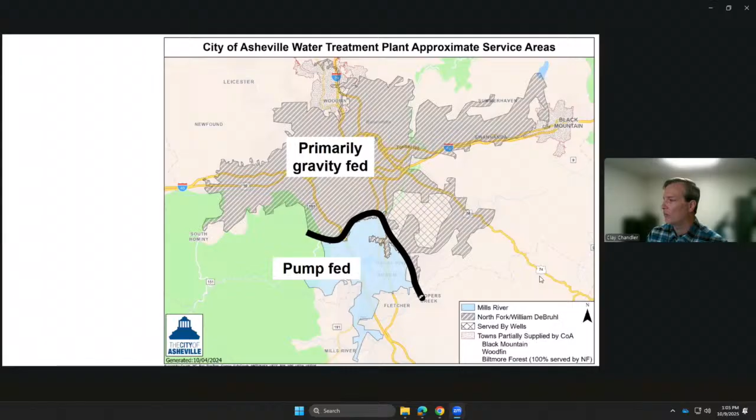We have 3 water treatment facilities. North Fork, in Black Mountain, is our workhorse. It supplies water to about 80% of our customers, and it pulls out of a reservoir. William DeBruhl is just over the ridge from North Fork, and that was actually our first treatment plant—a water treatment facility has been operating on that site a little more than 100 years now. Mills River, in the southern part of our service area, is our newest facility. It came online in 1999.

We are rated to 43.5 million gallons of water per day. Our average daily demand hovers somewhere between 25 and 30 million gallons of water a day. But if we have to, we can redline those operations and push out 43.5 million gallons of water a day.

So talking about the impacts from Helene, the southern part of our service area was impacted. There was some damage, but it was limited compared to what the northern part of our district experienced, as you'll see in some of the upcoming slides.

Mills River never lost operation. It continued to provide water in the immediate aftermath of Helene and afterward.

We had substantial impact to North Fork and DeBruhl. Those treatment facilities sit at the bottom, and the reservoirs they pull out of sit at the bottom of a mountain valley, so we had extensive flooding and extensive landslides there. They were in pretty bad shape in the immediate aftermath of the storm.

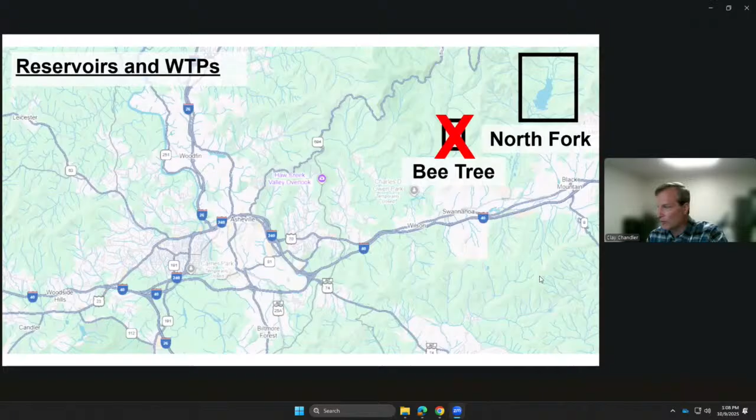Bee Tree was offline in the immediate aftermath of Helene. They had serious issues with landslides into the reservoir there, which drove up turbidity and eliminated the ability of our filters to handle that water. Bee Tree was the first plant to go offline during the storm.

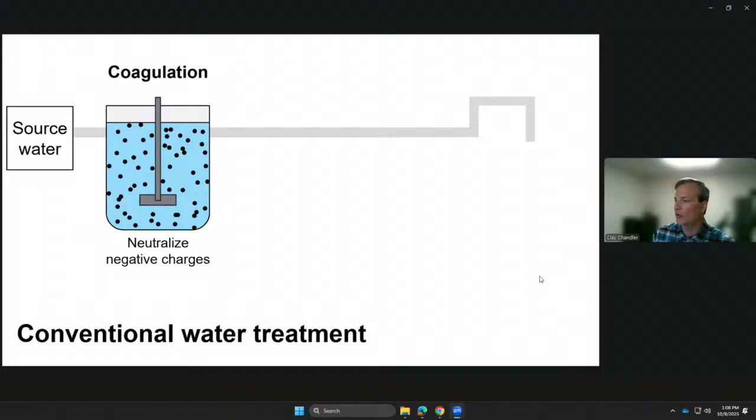We're the only water system in North Carolina that still uses that filter technology. We think we're one of the very few left in the United States, and that means our filters function best when they have pristine water to treat.

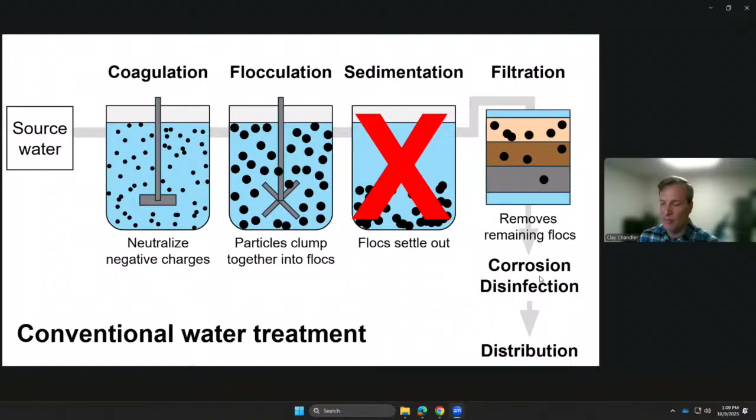Before Helene, they did. Our two reservoirs at North Fork and DeBruhl were pristine and crystal clear. In a lot of cases, the water directly out of the reservoir with no treatment or filtration almost met EPA drinking water standards. We were very, very proud of that. Generally, turbidity levels before the storm were less than 1. They're back to that now, have been for several months.

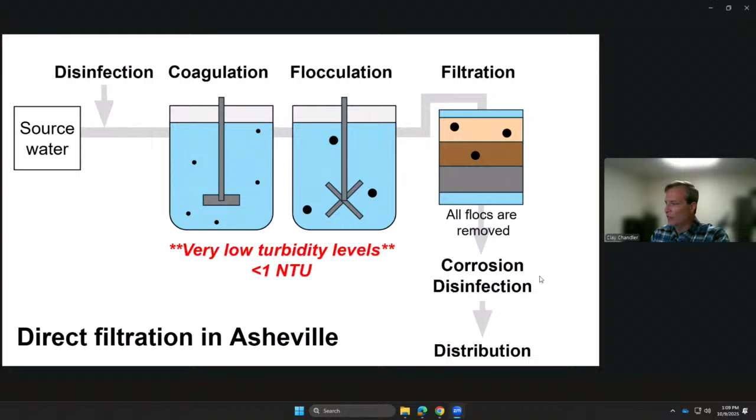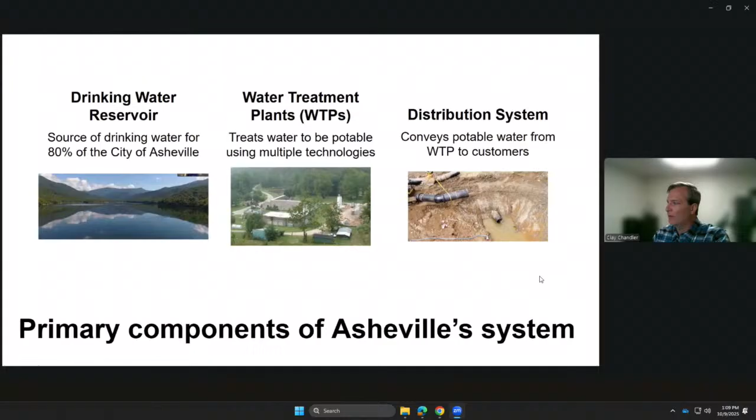You can see our treatment processes there. Before the storm, everything was great. The water was pristine, the filters did their job, they were happy. After the storm, that's a little bit of a different story. As you can see in the third square there, that's a preview of the damage that we were dealing with.

It washed out all 3 transmission mains coming out of North Fork: the 24 and 36-inch main lines, and the 36-inch bypass line that was installed after a hurricane event in 2004. That bypass line was designed to withstand an event like the one we had in 2004. As you will see here shortly, it was absolutely no match for Helene.

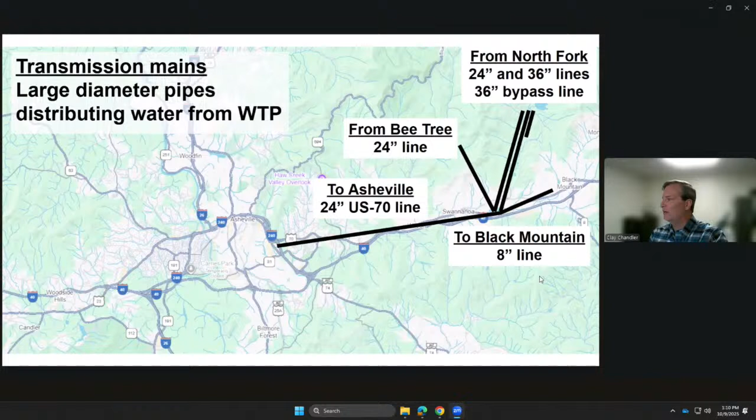Like I said, Bee Tree was also taken offline because of serious landslide issues into the reservoir there. Also taken out was an 8-inch line that serves one of our wholesale customers, the town of Black Mountain. Also taken out was our primary east-west corridor that runs along the Swannanoa River - in Swannanoa, that 24-inch line that runs along US Highway 70 was completely washed out as well. Again, visuals of all these coming up to show you.

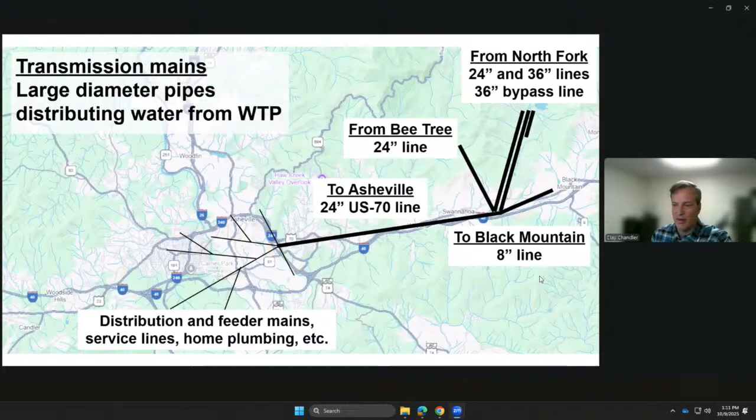We did have some damage in the city limits to our distribution system. We had some feeder mains and service lines that were messed up. Obviously, the internal plumbing of the homes that were in the path of the flood was messed up too. So we had a lot to deal with.

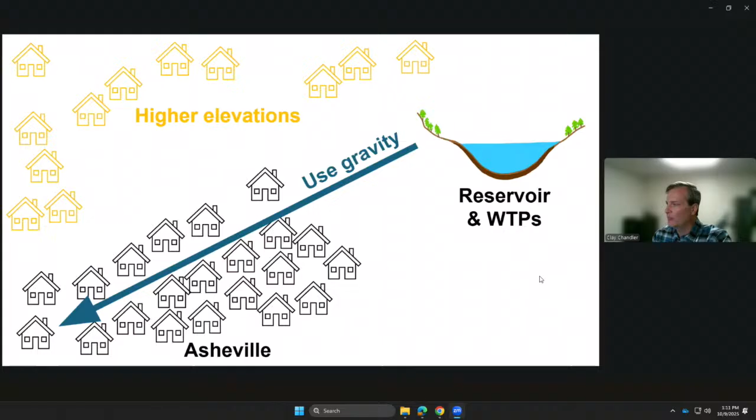The general way our system works, like I mentioned a minute ago, is we're gravity fed from our reservoirs. For higher elevations, we have a couple dozen pump stations that push water up those mountains and get them to the service connections.

That pumps the water uphill using a bunch of different pressure zones that we have. This is another thing that makes us unique. A water system of our size on flat ground would have one, maybe two pressure zones. As you can see, we have 43 scattered throughout our distribution system.

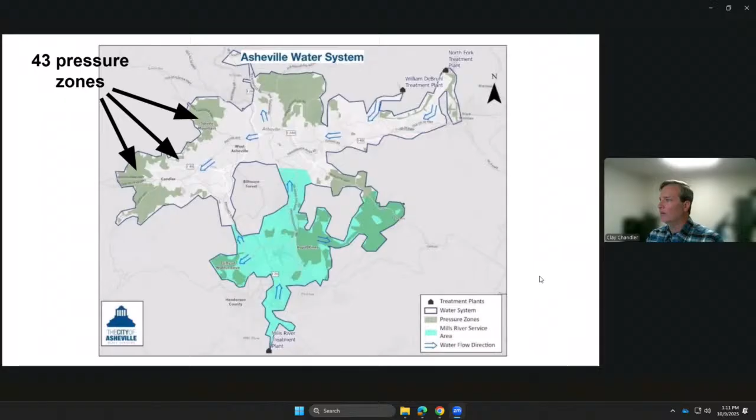That is a very delicate balancing act because you're talking about extreme pressure changes that are pretty close to each other. Our staff does a really good job of maintaining that balance. We have pretty amazing people who come to work with us every day.

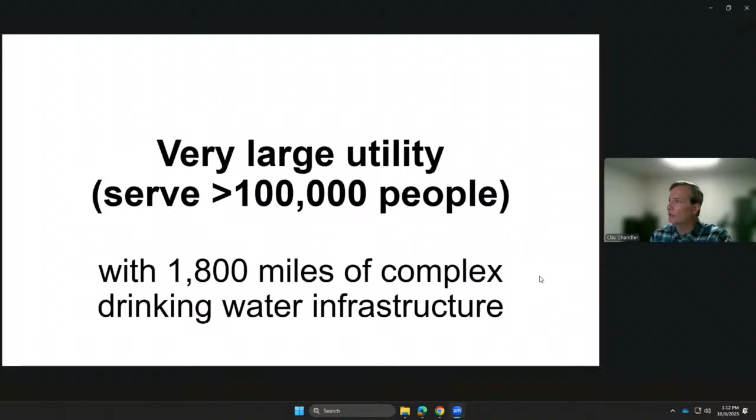We're considered a very large utility because we serve over 100,000 people. We have about 64,000 connections or meters that we deliver water to every day, and that translates to about 165,000 or so people who use the water. We have 1,800 miles of pretty complex drinking water infrastructure. For example, that is the same distance as traveling from Asheville to Miami and back, or from Asheville to Denver. So as you can see, we have our hands full under the best of circumstances.

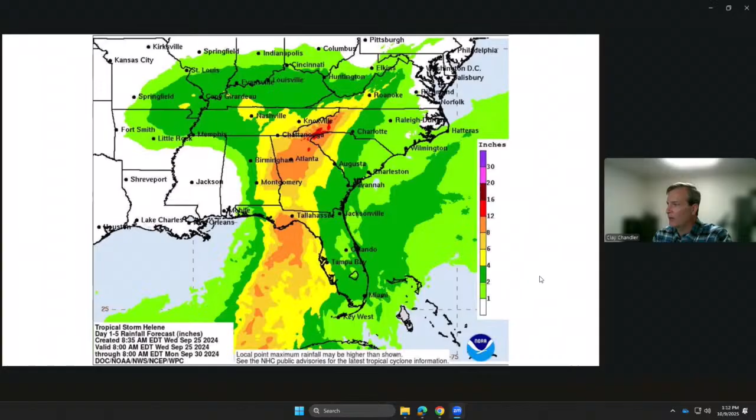In preparation for Helene, here's what we did. We doubled staffing at Mills River Treatment Plant and North Fork Water Treatment Plant. We routed water through that bypass I mentioned a minute ago. I think we did that on Monday or Tuesday of that week, a couple of days before Helene came through. We took water out of the mains coming out of North Fork and routed it through that bypass, which again was installed as a redundancy after a pretty severe 2004 hurricane event.

We created treatment plant status sheets. Brenna and I were both looking at those the morning of Helene. We were pretty locked in on those, and we knew around 10 o'clock that morning that we had a pretty serious problem because demand at North Fork jumped from around 25 million gallons a day to 35.

For customer communications, we have a system called AVL Alert. It uses the Everbridge software system. We can do system-wide or targeted communications to our customers. We leaned heavily on that, at least during the first part of the storm while we still had internet service. Internet service, along with every other utility, was knocked out starting, I think, around Friday night, Saturday morning, right around there. So we had to get pretty creative.

North Fork Reservoir, in 2020, we completed a resiliency project. It's the auxiliary spillway that complements the primary spillway that has been in place out at North Fork, I believe, since like the mid-1950s. It's a fuse gate system that is activated automatically when the reservoir reaches a certain level, like it did during Helene.

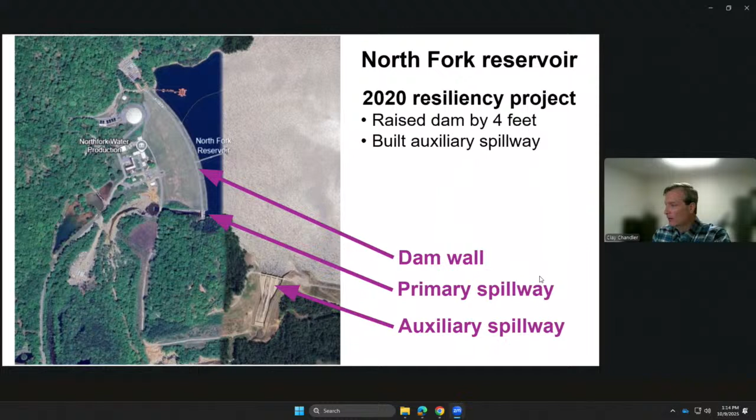Before Helene, we were 8 feet below full pool. By Thursday night, September 26th, which was the night before the worst of the storm got here, we were at full pool. So we went from 8 feet below to full in about 12 to 14 hours, which is pretty remarkable when you think about a reservoir that has 300 or so surface acres and 6 billion gallons of water in it. That gives you an idea of the amount of rainfall we were dealing with.

By 9:30 on the morning of September the 27th, which was the height of it, we were at 10 feet above full pool. So in about 24 hours, the reservoir, again 6 billion gallons of water across about 300 surface acres, rose 18 feet. I hope I never see that again. We remained about 10 feet above full pool until about noon on the 27th, once the worst of the storm got out of here.

That's the thing about Helene. It got here pretty quick and it moved out of here pretty quick, thank goodness, because if it had stalled any, it would have been so much worse than what it already was.

Here is the auxiliary spillway I mentioned. That was completed in 2020. It was about a $40 million project that, from design and construction to operation, took between 7 and 8 years. It relies on a fuse gate system. It's very pretty to look at. That's what it looked like before Helene.

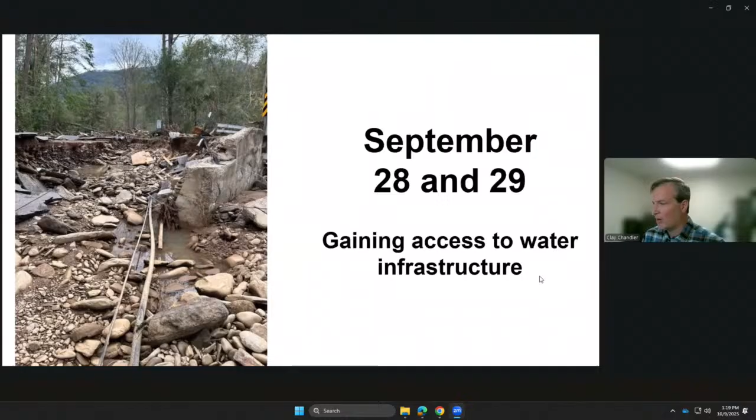I do want to give a shout out to the City of Asheville's Public Works Department. They did yeoman's work clearing roads that looked like this so we could access parts of our system to get as clear a picture as possible about the extent and scope of the damage we were dealing with.

September 30th is when we kind of started our recovery. That was day one, about 3 days or so after Helene, because that was the first time we could gain full access to our system. Again, our public works teams did an amazing job clearing roads so our personnel could get to where they needed to be. And we had a couple of really big problems on September 30th.

Number one, we had a distribution system, especially in the eastern third, that was pretty much completely wiped out. That was in the Swannanoa area for the most part. On top of that, the turbidity in our reservoirs had spiked from the usual below 1 NTU - in fact, I think today it's right around 0.8 or something like that. At North Fork, turbidity reached almost 100 NTU. At DeBruhl and Bee Tree, and some of the deeper parts of that reservoir, turbidity exceeded 500 NTU. So water that was normally crystal blue, pristine - you could see 10 to 15 feet down into the reservoir - looked more like chocolate milk at North Fork, and at Bee Tree it kind of looked like a chocolate milkshake. That's how thick it was.

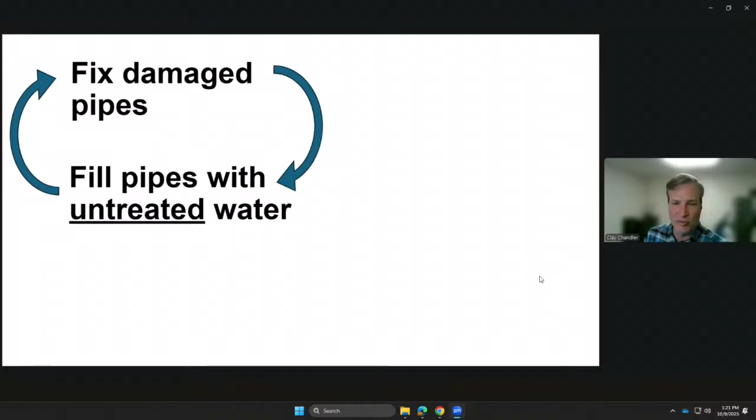So step one was to fix the distribution system so we could pump some kind of water into it. Our leadership made the decision, once the distribution system was fixed, because turbidity was too high in the reservoir to run through our filters, we would start feeding highly chlorinated raw lake water into the system. Once that happened, we issued a boil water notice, obviously. And once we were able to feed that highly chlorinated raw lake water into our system, the next problem we turned our attention to was reducing the turbidity in the reservoirs as best we could, so we could run it through our filters and make the water potable again - potable treated water.

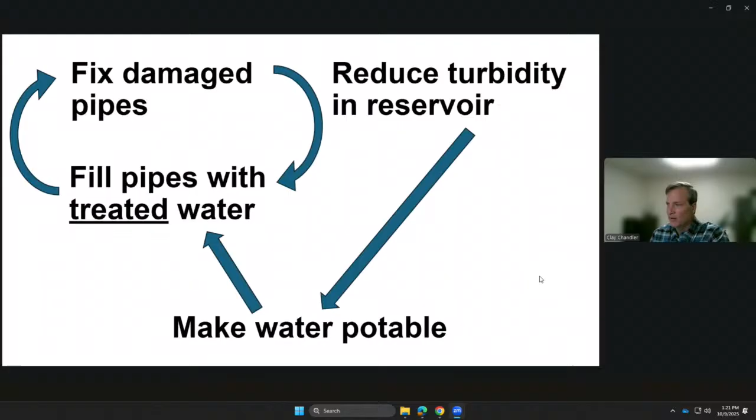And here's a really, really good example.

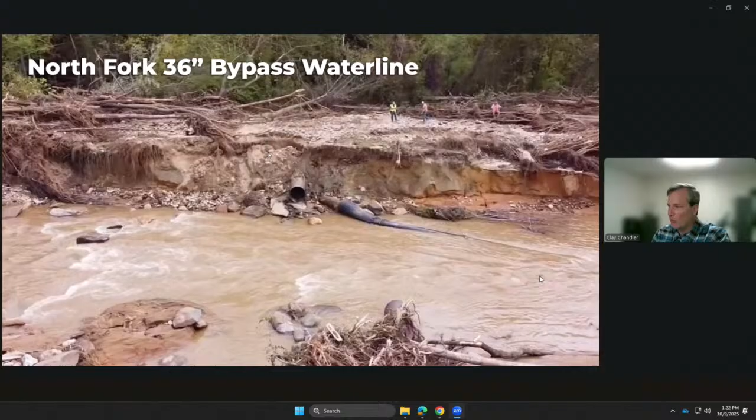This is the 36-inch bypass at North Fork. That pipe right there serves about 80% of our water customers. Before the storm, that pipe was about 25 feet underground. As you can see here, it is no longer 25 feet under the ground.

That pipe was installed after a hurricane event in 2004 as a redundancy. It was designed to withstand an event like the one we had in 2004. As you can see here, it was no match for Helene.

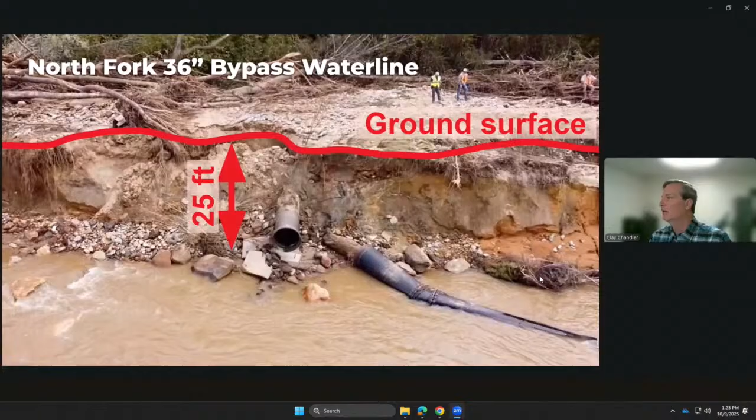T&K Utilities got to work as quickly as they could. They were able to access the job site at North Fork on September the 30th. That's why day one of our recovery began that way.

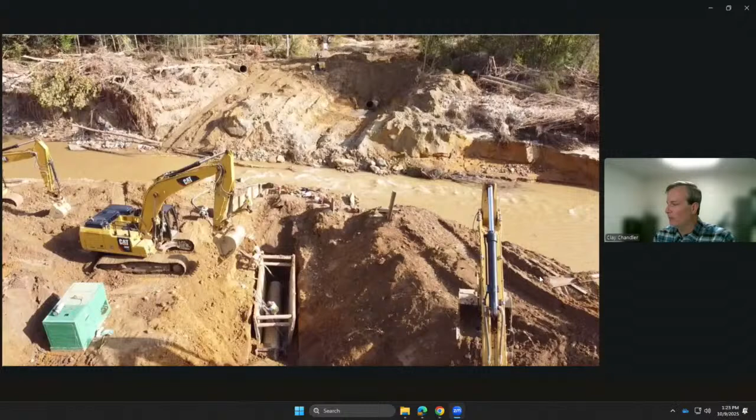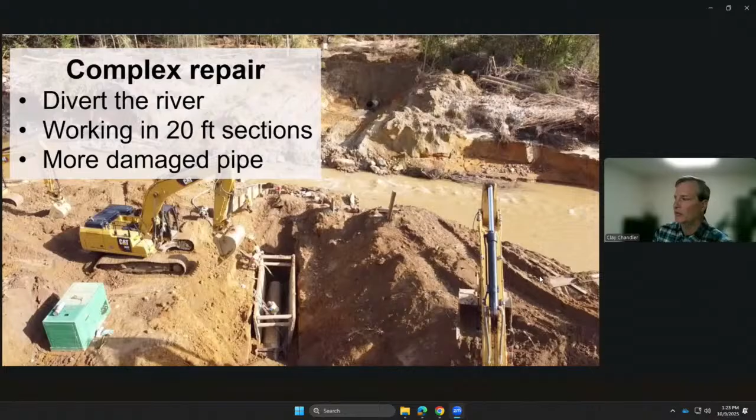You're talking about a pretty complicated fix here. Number one, they had to divert the river. You can see the dry box there they were working in. They worked in 20-foot sections of 36-inch water line to get water back into the system.

They worked 24 hours a day, around the clock. And late in the night on October the 10th, they were able to connect the bypass back into the system. This picture was taken very early in the morning of October the 11th. Shout out to Trent and the boys at T&K Utilities.

We have this photo blown up and framed. It hangs in our office. And on my last day at City of Asheville Water Resources, which I hope is a couple of decades from now, I'm taking that photo with me.

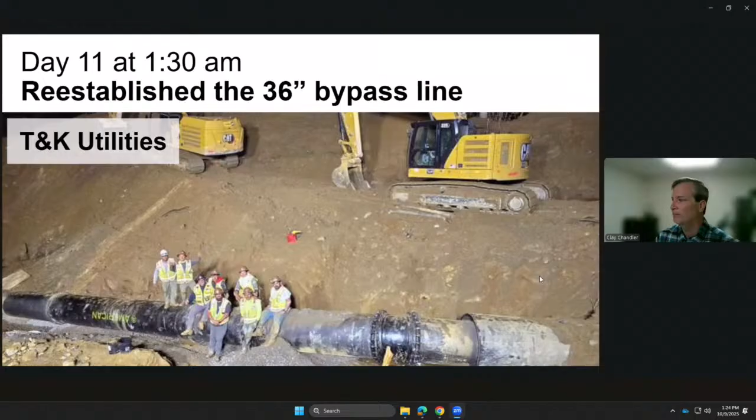So the normal timeline to repair and replace 2,500 feet of water transmission main between planning, design, construction, and operation would be a couple of years. For example, we have a project going on in downtown Asheville right now where we are replacing about 6,600 feet of water line. That project started a couple of months before Helene.

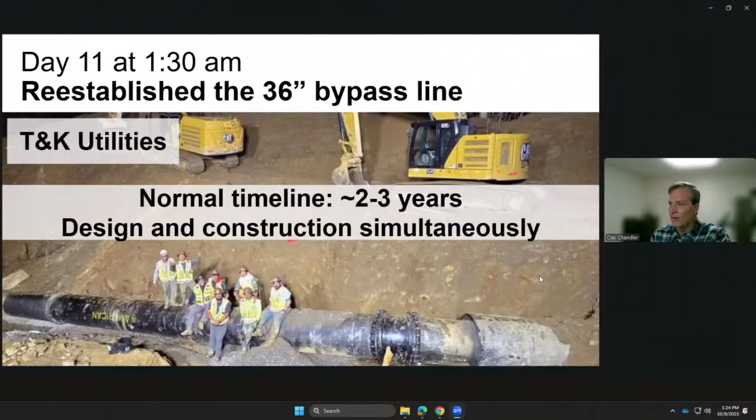It was delayed, obviously, for a few months after the storm. It has since started back, but that project is a 2-year project. So 6,600 feet of water line under normal circumstances would take much, much longer than 15 days. Again, our private partners were amazing during this whole process.

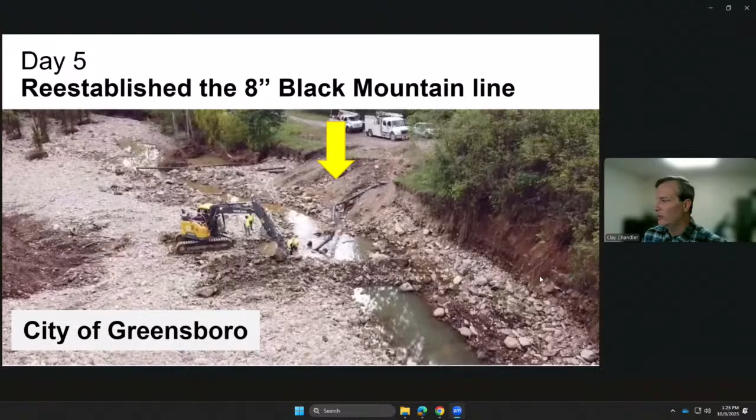Day 5, we connected the 8-inch water line that serves the town of Black Mountain, one of our wholesale customers. Big thanks to City of Greensboro and their crews for handling that for us.

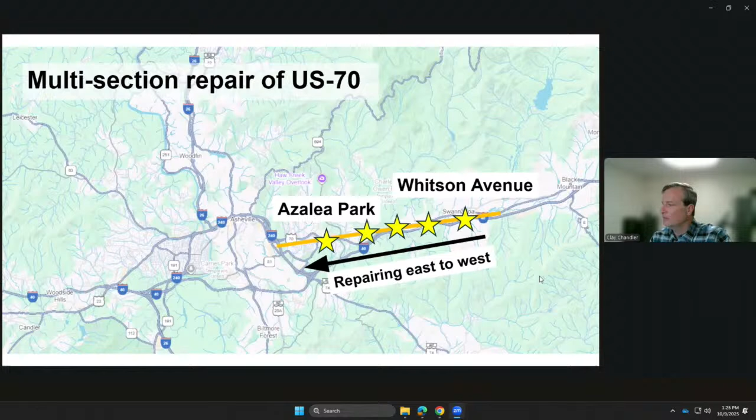This is probably the most extensive and complicated repair we had to do in our distribution system, which runs along the Swannanoa River. Again, you go out to the Swannanoa River today, it's very tranquil, pleasant to look at. That was not the case on September the 27th.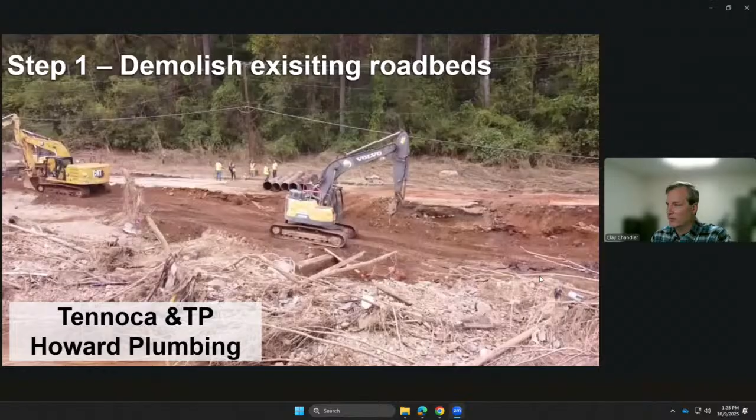As you can see here, Tennoca Construction and TP Howard Plumbing, they had a big job ahead of them because that's what Highway 70, which our water lines run alongside of, looked like. There's some of the old water line there. You can see the bridge, which complicated things.

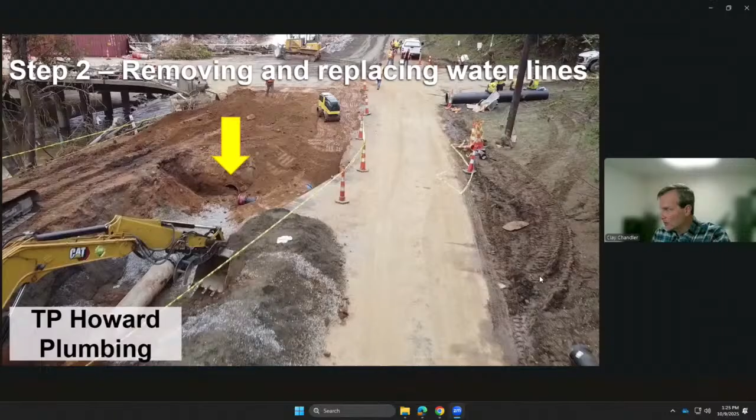Debris piled up against it, causing all sorts of mayhem and destruction. There's another look at it after they got a little bit of the roadbed rebuilt. And like I mentioned, damage was often near bridges.

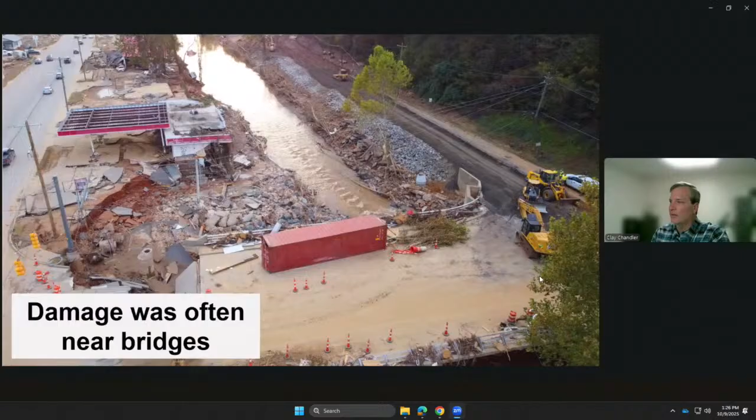I still don't understand how that bridge survived the storm. I really don't. It's about the only thing that survived as far as a structure in that area. It's still there today. I'm not sure if it's reopened, but it's still standing. You can see that gas station right there was pretty much completely wiped out.

Bee Tree was still offline. Bee Tree is a redundancy. It's kind of our little engine that could. We can pressurize the entire system using just North Fork and Mills River. Again, Mills River never went offline.

We started here in the east, pushed water west through Swannanoa into the city limits here. Downtown is right along in here somewhere, and then out into West Asheville. That process started on October the 11th, and by October the 21st or 22nd, all of our customers who could receive water service, their home or business was still intact enough to receive it, were getting it. So what's that, about 25 or 26 days to get about 95% of water service restored.

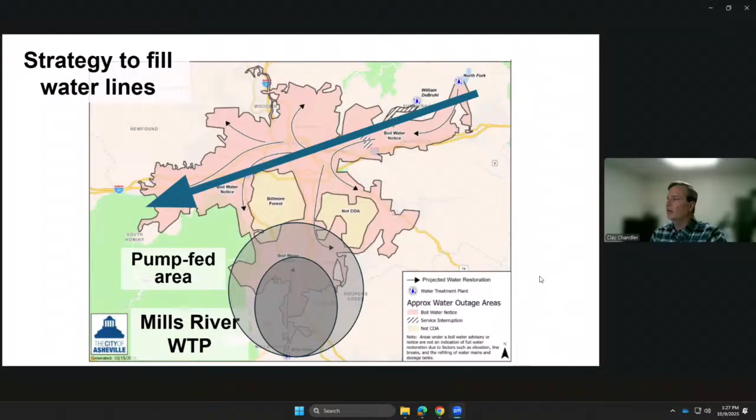Fixing the infrastructure, obviously nothing could happen until that 36-inch bypass was reconnected. Then nothing else could happen until the 24-inch main along US Highway 70 at Swannanoa was fixed.

On day 12, the bypass was connected, and we started feeding raw water into Black Mountain and into our customers in Swannanoa going west. On day 13 and 14, East Asheville started to get water service. By day 16, North Asheville and West Asheville started to get back into service too.

A lot of very, very small breaks and repairs that we only started to discover after the system began to pressurize. It was kind of whack-a-mole at some point. Things would be going well, then we'd have a geyser somewhere based on damage that we couldn't see until water was actually running through the pipes.

So within 22 days, we had about 95% of our distribution system put back together. Again, thanks to a Herculean effort from our partners in the private sector, and from our sister water utilities across North Carolina and really across the eastern seaboard.

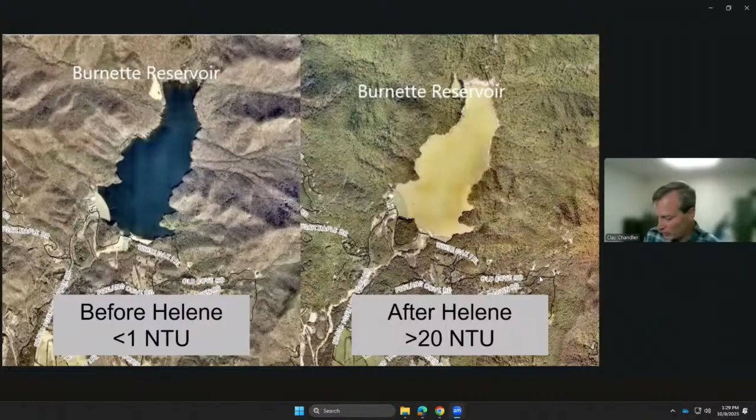So on October the 30th, we were able to start treating very small amounts of water, running it through our filters. One of our private engineering partners had constructed what amounted to a very small pilot treatment plant that had the same kind of direct filtration filters that we use. We started running lake water through that. We felt pretty good about the results.

And so, again, all of this is caused by sediment associated with runoff. Something I probably should have mentioned before now, what Helene did to the reservoirs at our treatment plants was she basically flipped them upside down. She brought everything that was on the bottom, all that sand, silt, sediment, and everything else, brought all of that right to the top.

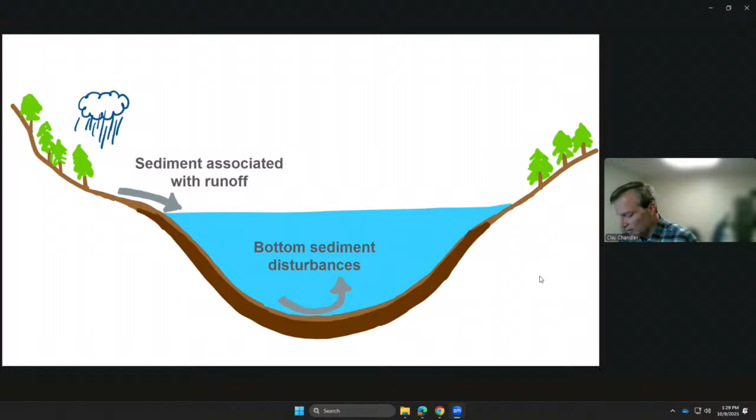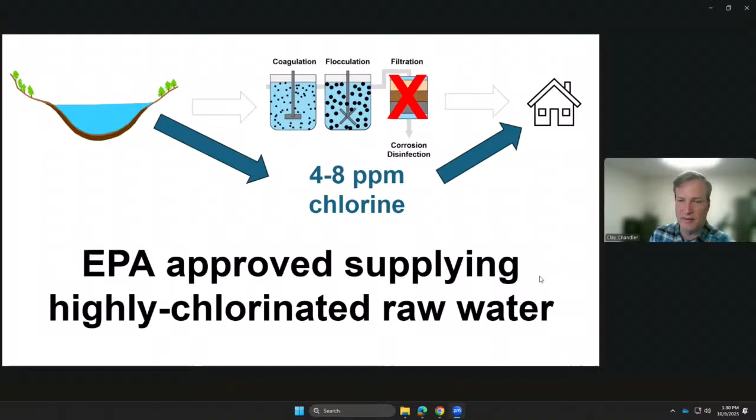Backing up just a little bit, the raw water decision that we made, we fed between 4 and 8 parts per million of chlorine. Normally, we're right around 1.6 to 1.8 parts per million under normal circumstances. That was deemed appropriate, and we worked with EPA and DEQ on this plan before we actually put it into motion. We did have bacteria concerns, so we used elevated levels of chlorine because we weren't able to run it through our normal treatment systems.

Again, these protocols are outlined in our emergency response plan, and I'll talk a little bit about that as we move forward. But the ERP was critical. We leaned on it during the response. It spelled out pretty much exactly what we were supposed to do, who was supposed to do it, and when they were supposed to do it.

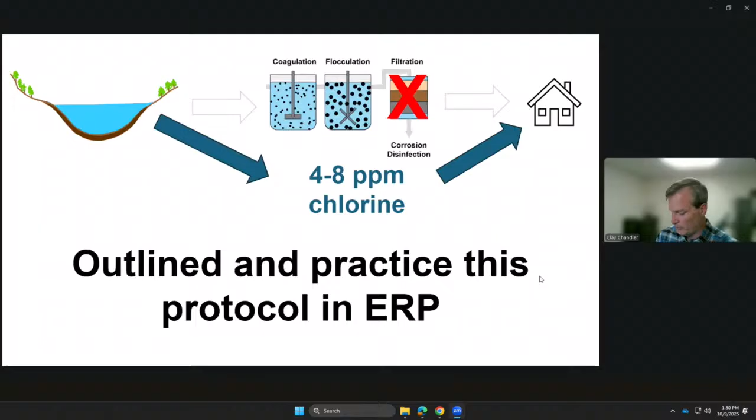So the highly chlorinated raw lake water, it didn't look good, it didn't smell good, it didn't taste good, even if you had boiled it for at least a minute before you consumed it. But it did serve two very, very critical purposes. Number one, basic sanitation. People could flush their toilets. In the first couple of weeks after Helene, you couldn't walk 10 feet without passing a bank of porta-johns.

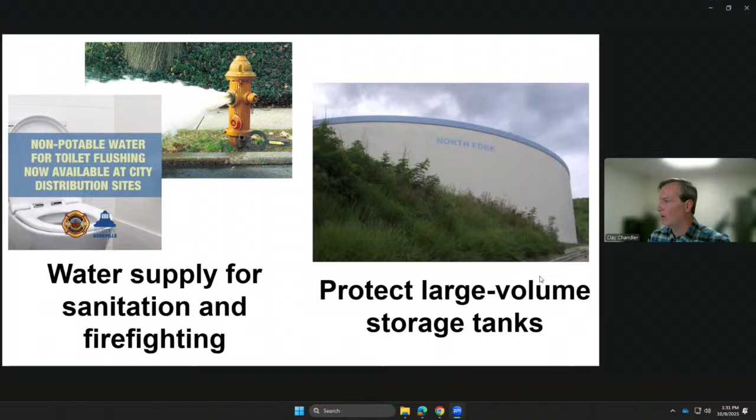Along with the sanitation purpose it served, it provided critical fire flow for our fire departments. It also protected our large volume storage tanks, the elevated chlorine levels kept them nice and disinfected.

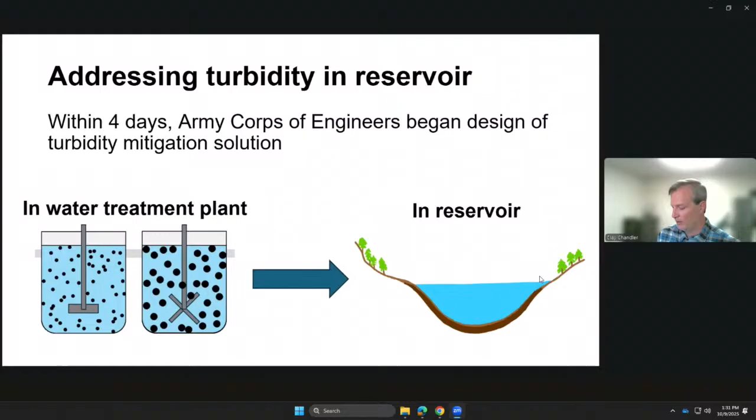And so, like I mentioned, after we started feeding raw water into the system, the next big problem we had to solve was addressing the turbidity of the reservoir. Again, immediately after the storm, North Fork was pretty close to 100 NTU. In the deeper parts of Bee Tree, at the Debruhl treatment plant, that number exceeded 500.

So to sort of speed up the turbidity reduction process, we did 3 rounds of in-reservoir alum and caustic soda treatment. You can see there the airboat, that's what that's doing. And look, I'm a communications person, I'm visual, and it's kind of unsettling to see 2 people on a boat wearing hazmat suits driving a boat across your drinking water reservoir. I don't think I'll ever get over the sight of that, but it did work.

I did mention the pilot plant that CDM Smith put together for us. That sort of helped us come to the conclusion that after a couple of weeks, turbidity had fallen to the point where our filters could handle at least small amounts of water, and we could start blending raw water with treated water.

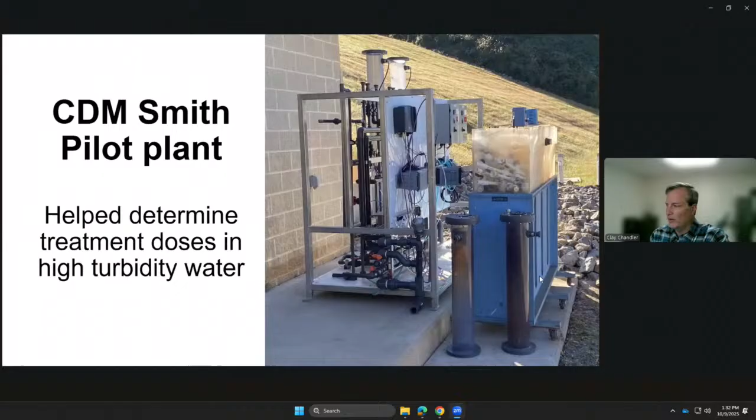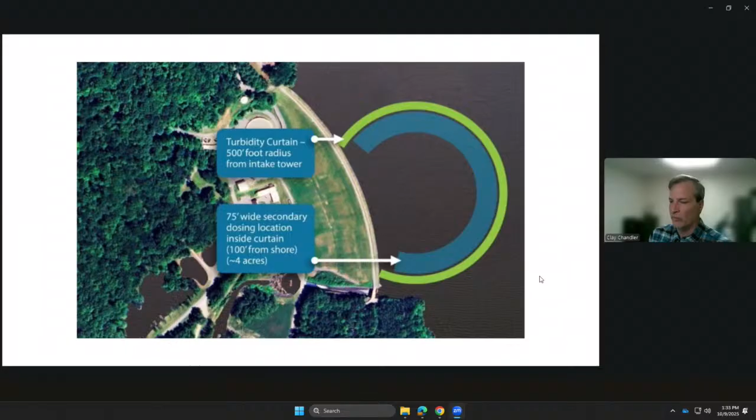You can see how brown that water is in North Fork, even a couple of weeks after Helene.

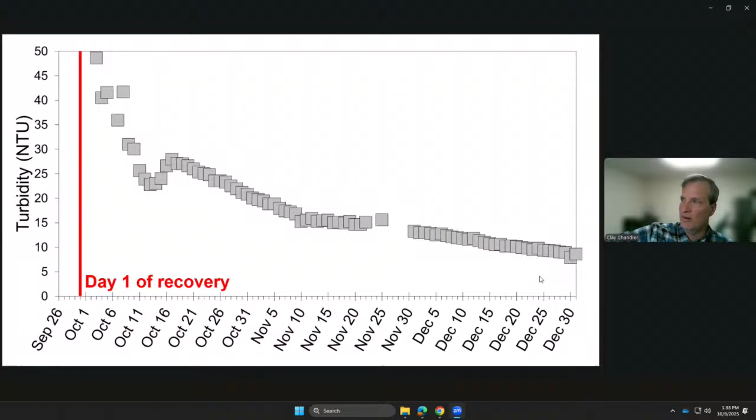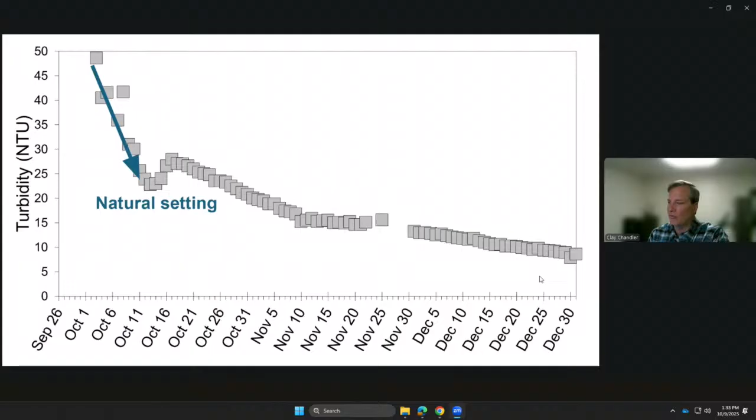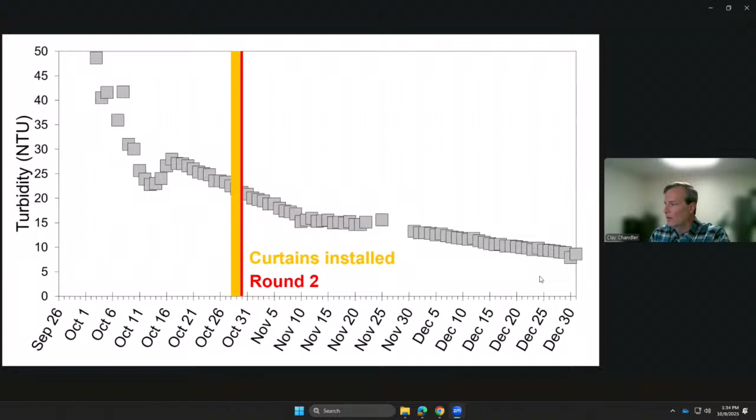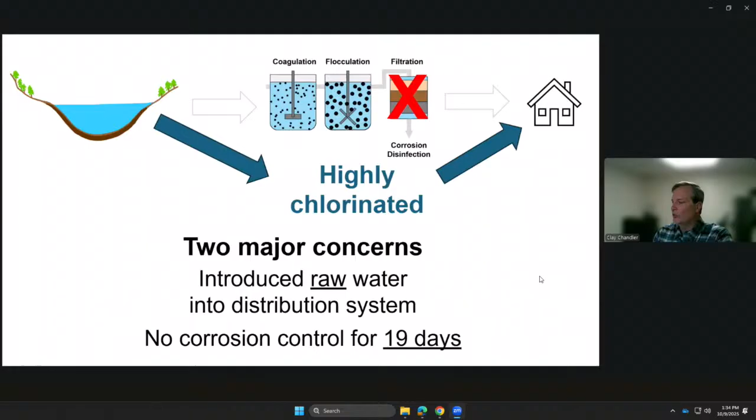So, a couple of major concerns with introducing highly chlorinated raw water into our system. One of those being we were without corrosion control for 19 days.

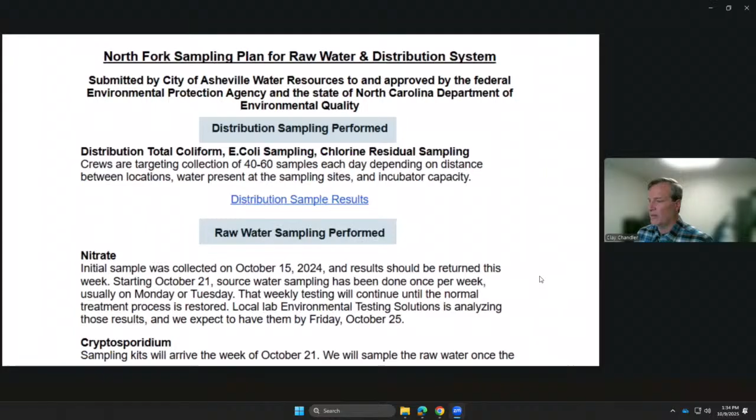We did have a sampling plan for raw water throughout our distribution system. Brenna and her staff did amazing work, working themselves to the point of exhaustion, taking dozens and dozens of samples throughout the system every single day. All told, from the time we started the enhanced sampling process until we lifted the boil water notice and got back to normal, our lab staff took a total of way over 1,000 samples.

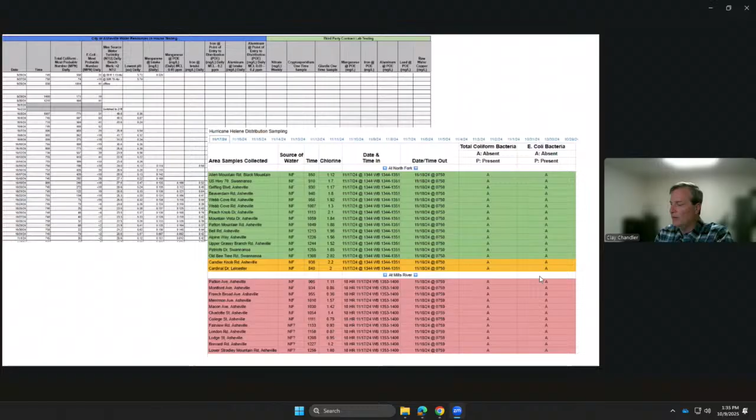We also did sampling in our reservoir - daily testing for bacteria, pH, and turbidity, daily testing at the intake and the point of entry to the distribution system for manganese, iron, and aluminum, and weekly testing for nitrate. There's a spreadsheet of all our sampling and analysis results. Again, our lab staff did amazing work pulling all that off in such a short amount of time.

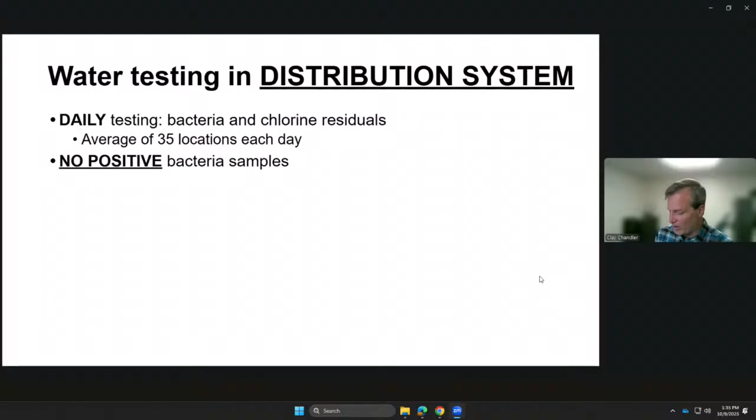In our distribution system, we did daily testing for bacteria and chlorine residuals, averaging 35 locations every day. We are very proud to say that we had no positive bacteria samples the entire time.

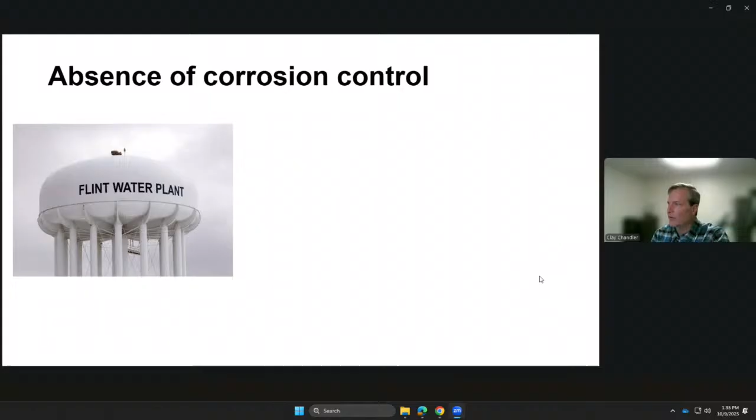I mentioned the absence of corrosion control - obviously that brings up lead concerns. Everybody sees the Flint water tower there. Here are some differences between Flint and Asheville.

In Asheville, we have no known lead service lines. Our main lead concern is the internal plumbing of buildings built before the lead ban in 1988 - some of those homes will have galvanized iron lines. Also, we didn't change our source water. Flint changed from a reservoir to a river. We did not do that.

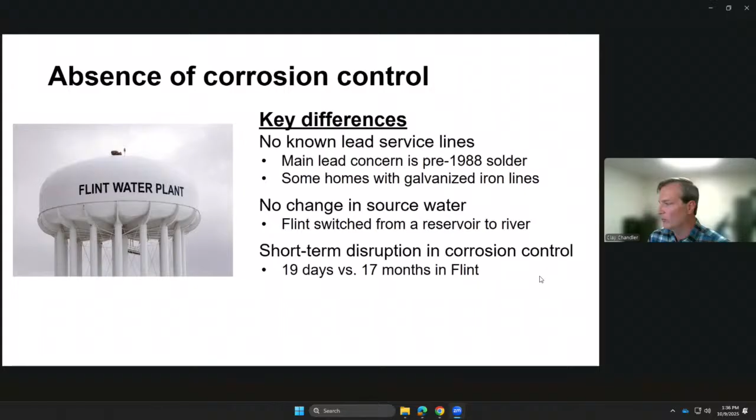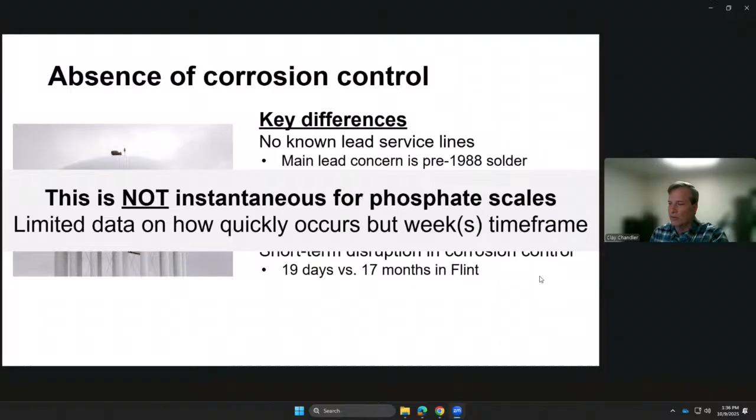In the short term, disruption of corrosion control for us was 19 days. In Flint, it was 17 months. There's not a lot of concrete data on how long corrosion control lasts after you stop it, but we do know it's not instantaneous for the phosphate scales. There's limited data on how quickly that occurs, but it's generally accepted that it takes weeks. We were not out of corrosion control for weeks - we were only out for 19 days.

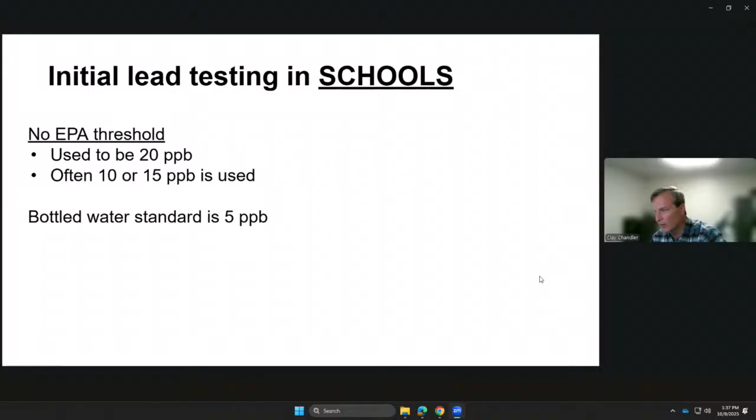We did do initial lead testing in schools under the direction of DEQ. The lead threshold kind of jumps all over the place - it used to be 20 parts per billion, a lot of times it's between 10 and 15 parts per billion, and the bottled water standard is 5 parts per billion.

That obviously shows just how much of an effect stagnation can have, especially if you have lead service lines in your house or business. By the time we tested these schools, water had been sitting stagnant in those pipes in some cases for three weeks, almost a month.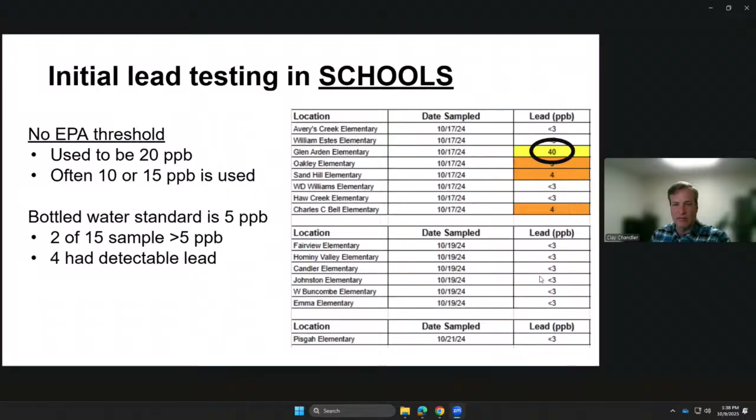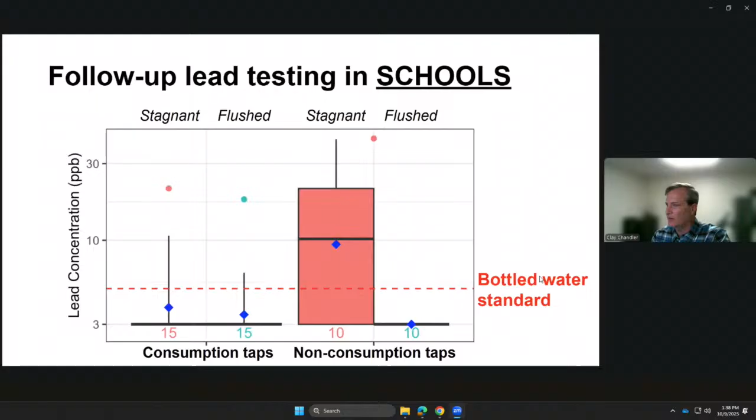There's Glen Arden Elementary again, which is in the Mills River service area, which never lost corrosion control. We did follow-up lead testing in schools, consumption taps and non-consumption taps. Results were much closer to normal during those follow-up testing. There's the stagnant and the flushed results, pre and post testing at lead and copper rule sites.

We had completed a couple of months before Helene our regular annual compliance testing, met the 90th percentile, no issues. And as you can see, in our follow-up compliance testing in December, the results were actually better. Compliance and Sentinel sites are key for assessing impact.

After all of that, on November 18th, after our lab staff were able to sample throughout the system and analyze the results, no presence of bacteria, chlorine levels were back to normal, we were able to lift the boil water notice. That was a very good day. Again, no bacteria detected, no raw.

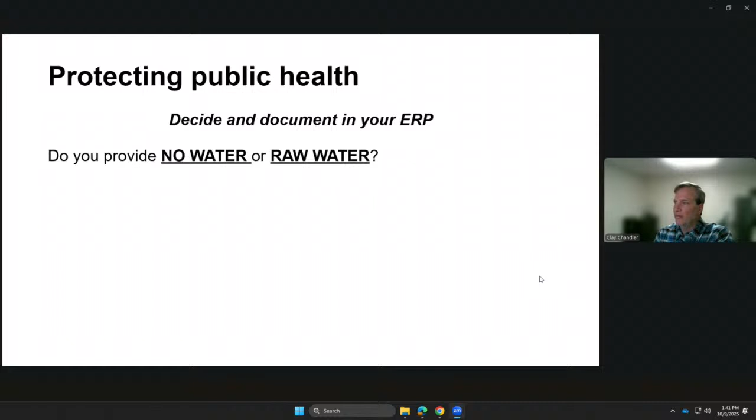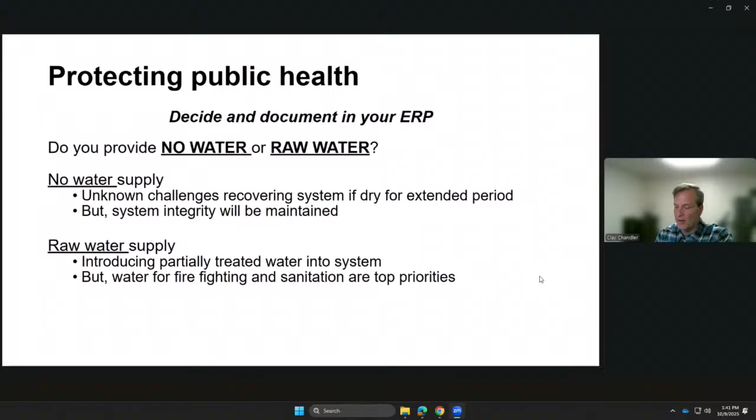Again, we mentioned the debate between raw water and no water supply, and obviously the unknown challenges of getting the system recovered if it's dry for an extended period. Raw water, introducing partially treated water into the system, there are some disadvantages that come along with that. But again, you're talking about basic sanitation and fire flow, no water versus raw water, protecting against acute or chronic health risk.

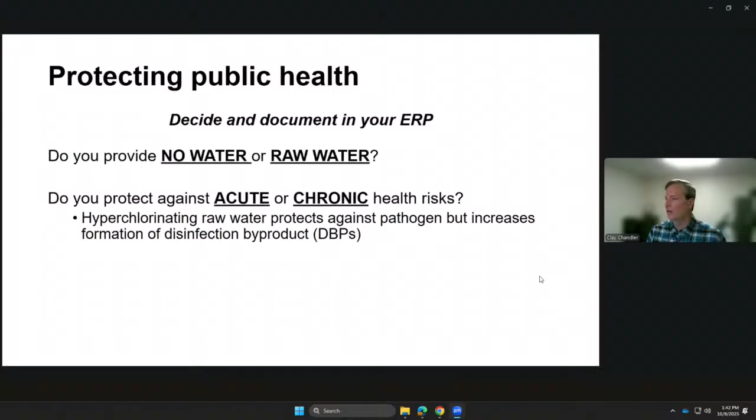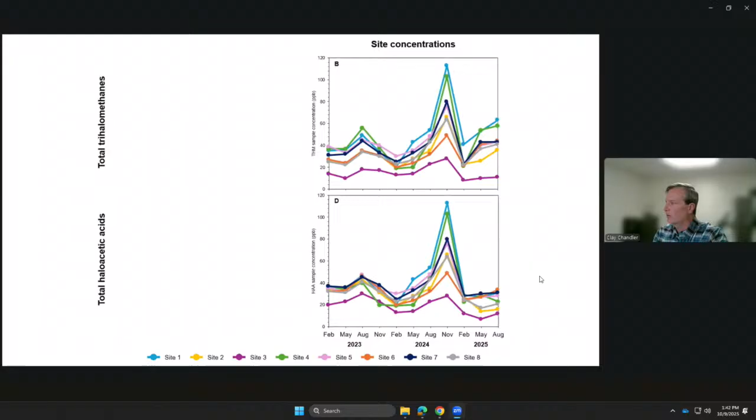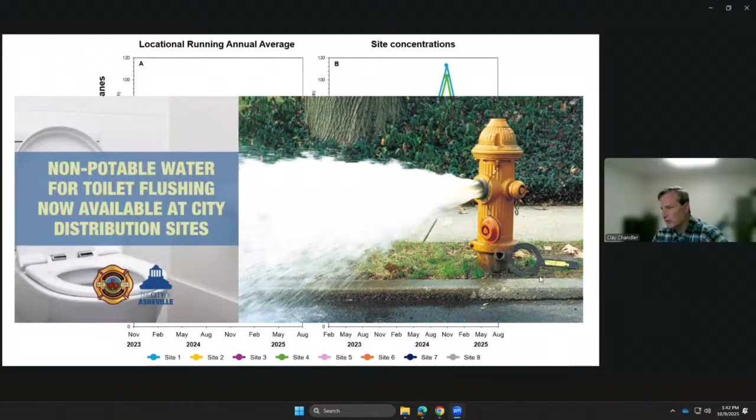Hyperchlorinating raw water protects against pathogens, obviously, but does increase the formation of disinfection byproducts, or DBPs. There's our THM and haloacetic acid levels, and you can see they're pretty elevated in October and the early part of November. Sampling occurred in November 24. Risk from consuming water for 70 years - EPA uses that running average for the THMs and the haloacetic acids. Non-potable water for toilet flushing. There's some of the graphic that we used when we started pushing raw water into the system.

Probably the single most important piece of advice, and Brenna will probably agree with this, update and practice your emergency response plan regularly. We have quarterly trainings that we do that Brenna is in charge of, and they proved invaluable when it came time for us to respond to Helene.

That's my presentation. Again, thank you for the opportunity for us to present. Every time we can tell our story, it helps us. And I think now I turn it back over to Jeff.